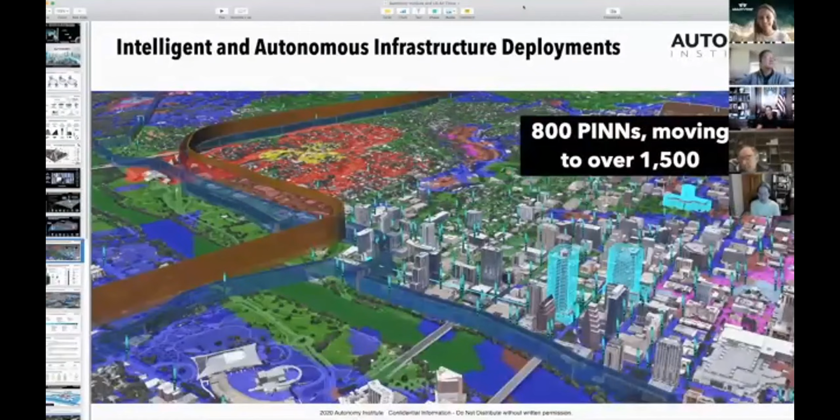This technology will have great benefit to the needs that we have in Alaska and the Arctic, where conventional aircraft, vehicles, and vessels oftentimes can't operate.

Agility Prime is part of our Defense Department's long history of turning futuristic ideas into reality. I'm proud that the federal government is investing in revolutionary ideas. Agility Prime is leading the way.

This launch of Agility Prime is so exciting. This technology has the potential to make vertical flight more affordable and more widely available.

And with the encouragement of the U.S. Air Force and the entire federal government, American companies employing American workers can gain a head start and win a fair share of this lucrative market.

eVTOLs have the same agile, vertical takeoff and landing capability as helicopters, but are quieter and should cost much less to operate because of their electric motors.

We are becoming a trusted innovation partner in commercial tech. I could not be prouder of this initiative. I could not be prouder of this team.

And I am excited to see how quickly we can go to help commercialize this market for our nation, so that our warfighters have options they don't have today, and our nation has an economic advantage far into the future.

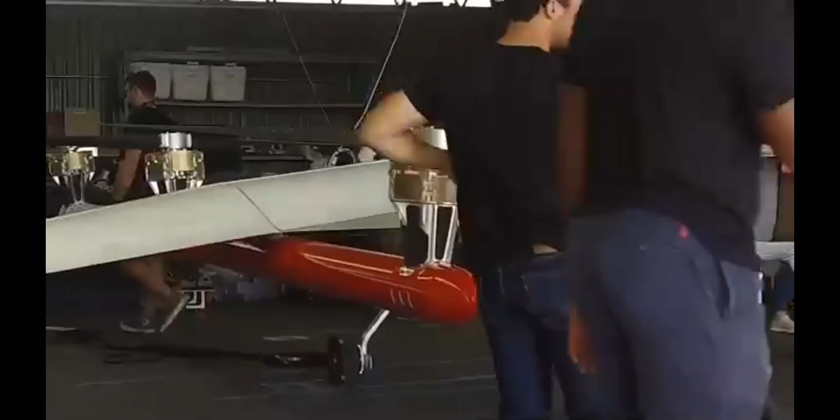It is truly a great credit to Agility Prime. They could put on this virtual event with so many hometowns of the United States represented.

You know, industrial base is not really about just what a country can make. More than that, it's about the people who dream up what to make. And then, of course, those people who make it.

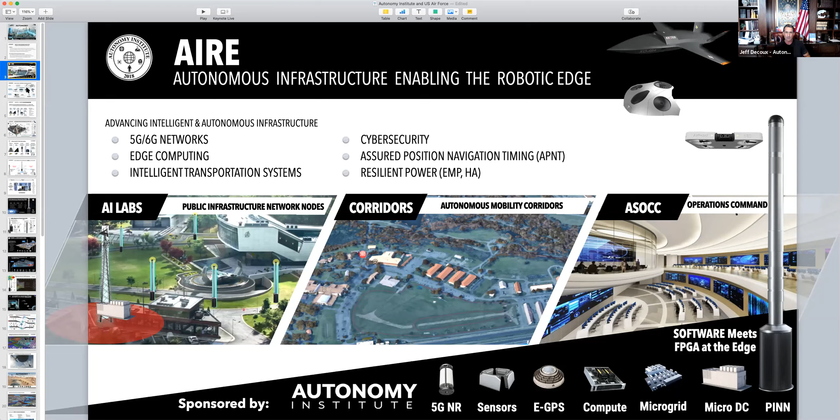By having these labs, we can accelerate testing, which will eventually lead to larger areas within cities, and that leads to the critical piece we're all dependent on—the policy and regulation that will support and embrace it, where society will actually enjoy the benefits of these new technologies.

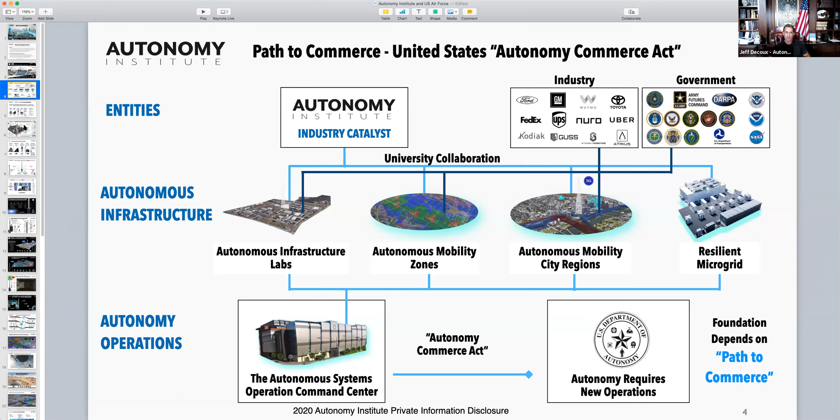So I'll leave it at this slide because it helps understand the magnitude of the challenge. This is not easy. It's challenging enough to get a sophisticated flying vehicle, an orb, up into the sky, and for it to be reliable, resilient, and certified. It's an even larger challenge if we don't have the appropriate highways and byways defined that allow these things to be deployed within a city, a suburban environment, or even a rural environment. There's critical technology that has to be adopted to allow these things to exist.

Our mission is to, as fast as possible, get a number of these 24/7 labs to scale test and allow a lot more collaboration between industry partners, academia, and government. We're looking forward to the initiatives of AFWERX and Agility Prime, because they happen to be the leading agency really driving innovation forward that we see from the DoD. I'll stop there for any questions.

Just for me personally, I haven't seen your talk before, so I'm a little curious—what is the benefit of having these PINNs distributed across cities instead of using something like a satellite network or a radar, wider area network?

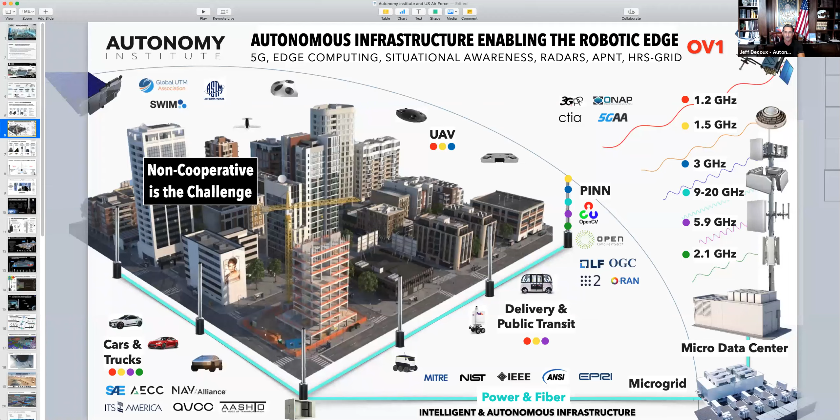If you're not aware, this is a good slide to show. If you're in a city, most likely you're starting to see things like this happening across the city, where a lot of antennas, whether cameras, lidars, or other types of radars, are being deployed by all kinds of different companies. That has to be solved through some infrastructure, and it's going to be densified with additional 5G, edge computing, and ITS technology.

So those are being handled by the P3, public-private partnerships. The funding for that, $150 million for, let's say, the scale of the City of Austin, is a process that's going forward to secure how this technology will be moving into the city and be supported for the community in that area.

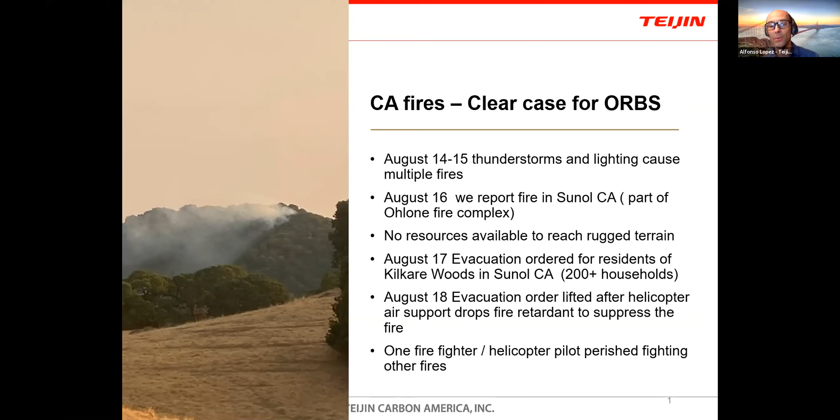And so I think orbs there are a clear case for this. So with that, thank you. Keep the passion. And for me personally, if there's orb makers that are tackling this, please call me. I would be personally very interested to work with you and support with Teijin materials wherever possible.

Okay, so Teijin is a global company. Teijin Carbon America is where I work. They have a lot of business divisions. So I'm just going to cover the composite material side of things, and that's Teijin Carbon America. Renegade Materials, high performance, high temperature stuff. Teijin Aramid, a lot of impact, abrasion, fire resistance, and safety applications. And Continental Structural Plastics, which one day may be bridging the divide between aerospace and very high rate components.

Okay, so just a quick overview. If you're taking screenshots, this is a good one. I'm not going to go into detail, but this has websites where you can get that kind of stuff. I'm mainly going to be talking on Teijin Carbon. I'm not going to be covering OPF, that's for carbon stuff, not that applicable. And then I'll be touching on Teijin Aramid, Renegade, and Continental.

DuPont has done a really good job on marketing and making Kevlar synonymous with Aramid, but we call ours Twaron, and it does an exceptional job. Renegade, they are very good and work with the military quite a bit. They're a recent addition, just last year, to the Teijin group. And we're hoping in the future they're going to grow, get integrated, and we're going to have more material options and technology transfer to them from our Japanese and German research offices.

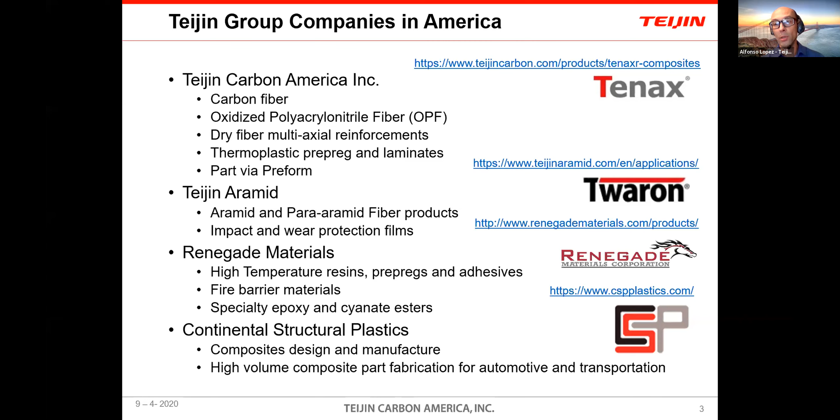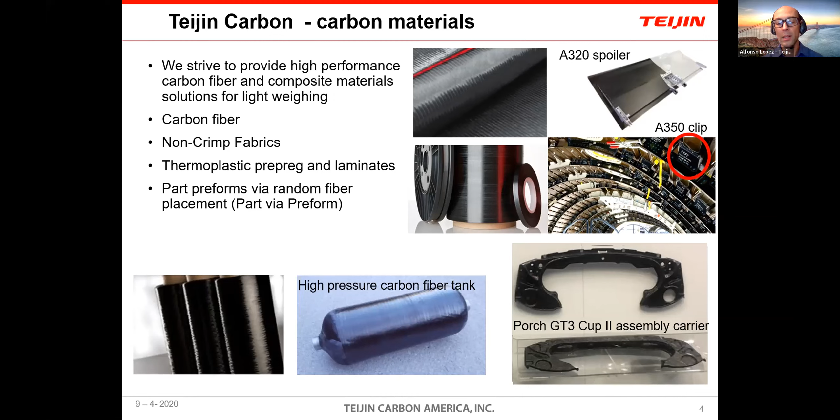Okay, I'm going to spend a little bit of time on this because this is my passion. In my previous life, I was an R&D engineer working mainly on out-of-autoclave stuff. And NCF, I think, is a very good option for orb makers that are going from design and thinking about high rate as well, just because of its qualities. You're getting more than 2 layers in one ply when you're laying it down, from 2 to 4 for us. It has excellent permeability and infusion qualities.

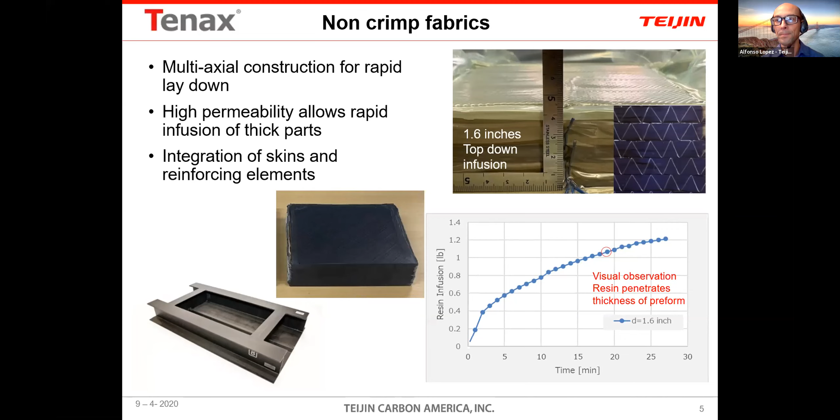We hope to see those results in the next couple months. And the second thing I'd say is please think of Teijin as a partner to learn how to use these. Most orb makers aren't ready for these. They require maturity, but you can start to learn and use them so that when you are ready, you know what to expect.

This doesn't get a lot of mention, but you can vacuum form these materials and get really good results. The most you'd need in specialized equipment is an oven that can go preferably above 400 degrees C. You do need to spend on things like polyimide film and high temperature sealants, but those are a lot less expensive than continuous compression molding or a steel mold with integrated heaters. You can start off as easy as a steel plate and just make panels to figure out how this stuff works, and move on to simple steel forms, L shapes, hat shapes.

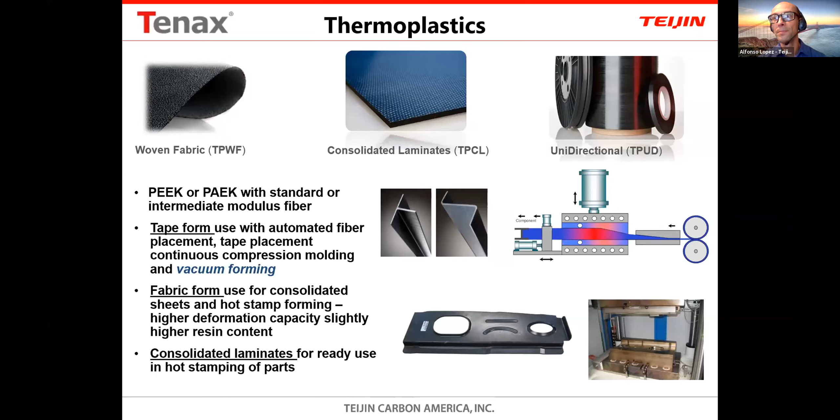The other one, and I hope Automaton's safety team doesn't get too angry at me, but they had a really good presentation the first week of the ecosystem, and their chute color scheme immediately reminded me of the supersonic braking chutes used with the Mars Lander rover missions, for which Teijin Aramid has been supplying cord. As well, there are other applications applicable for interiors where you might have wear applications, or high pressure vessels where you want some sort of covering in case of explosion and shrapnel.

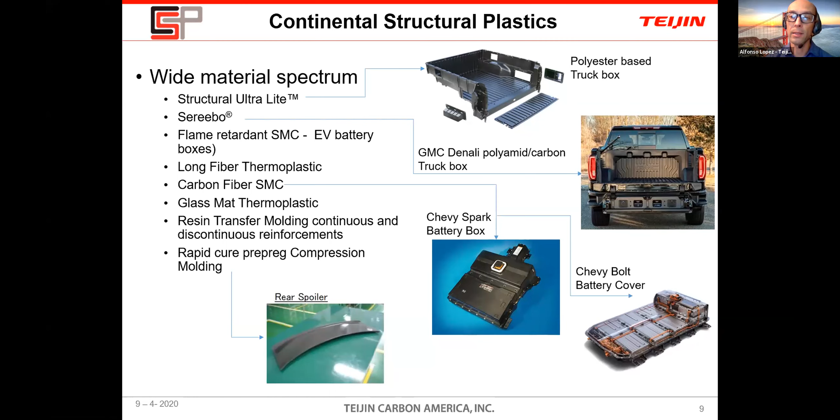Finally, something I'm really excited about is rapid cure prepregs and compression molding for primary structures. That picture on the bottom is a rear spoiler for a sports car, but with the appropriate resin system, that could translate into primary parts for rapid fabrication.

Last slide is just another screenshot. Here's our contact information, get in touch with us, use this as a soundboard for learning. If you need anything, just let me know. I'm personally very interested to work with orb makers looking at first responder type applications. With that, thank you very much, and I'll turn it over to Sterling.

Thanks, Alfonso, that was great. Just a question for me, out to the ecosystem in general: for folks starting up and working on their designs, what do you think is the best pathway for them to start incorporating composite design when engineering design tools don't have the strengths and design limits associated with your products?

Well, that's a good question. For a lot of early companies, they're looking for stuff that's readily accessible. Teijin works directly with big OEMs, not so much with early startups, but we are changing our practices to support small quantities. I think NCF is a direct material we offer that would be applicable when you're starting to learn about infusion. Most orb makers look at fabrics, but NCFs, as the commercial side demonstrates, really offer a good balance. They're easy to infuse and work with, and very robust for RTM or infusion processes.

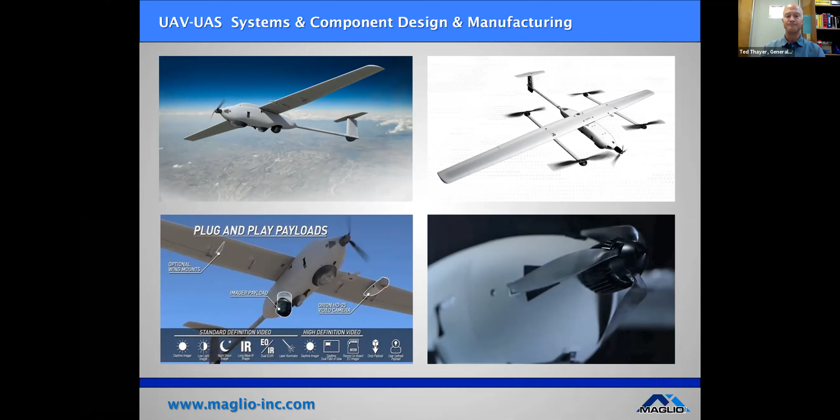To be clear, I want to point out in this slide, we don't manufacture these UAVs, but we manufacture most of the control systems, hardware, various carbon fiber pieces, and payload pieces, including retractable payload pieces. Let's skip the next slide.

So we specialize in engineering, prototyping, and short-run production manufacturing. We machine aluminum, titanium, plastics, brass, steel, and virtually any other material with a full complement of Haas mills and lathes. We perform carbon fiber layup and composites.

Other capabilities are assembly, electrical harnesses, industrial wiring, PCB soldering, mechanical bonding, fastening, other various composites like fiberglass and Kevlar, compression molding, trapped rubber, vacuum bag, casting with urethane, silicone, epoxy, finish work, laser cutting, engraving, machining, metal forming with a 3 foot by 4 foot, 150-ton metal press, metal fab, routing, CNC, electrical and mechanical assembly, vacuum forming, deep draw capability, testing, inspection, and various systems analysis.

If need be. Some of our clients are listed on this slide as well.

I'll close by saying a little bit about Maglio as a company. We've helped numerous customers over the years with various design, development, prototyping, and manufacturing projects. We really hold ourselves to the highest possible standards in terms of communication with our customers, staying within budgetary constraints, delivering projects on time, and ensuring all of our clients' and customers' end products meet expectations, perform flawlessly, and are really the absolute best they can be.

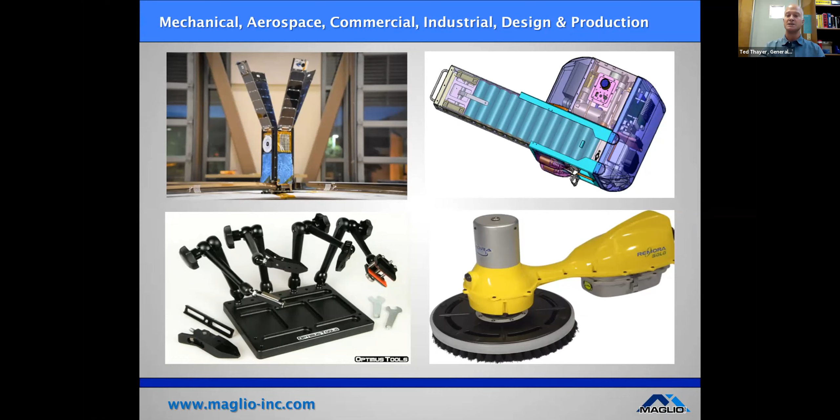I think to wrap this up, we're looking to potentially work within the Agility Prime ecosystem as a tier 2 manufacturer supplier for anyone looking for some of the capabilities we have. I'd be happy to discuss anyone's project or design ideas to see if we may be a good fit for your needs.

Per the request from Sterling and the Agility Prime folks to address some unique challenges we face, I'd say a routine challenge that we and most engineering manufacturing firms face, whether assessing, developing, or building out a project, is managing the inevitable project scope creep as requirements and capabilities morph and shift over time. Staying within budget is always a big concern, and we take that seriously. The key to successfully navigating this is constant communication with the customer and updates with the client, as you're probably all well aware.

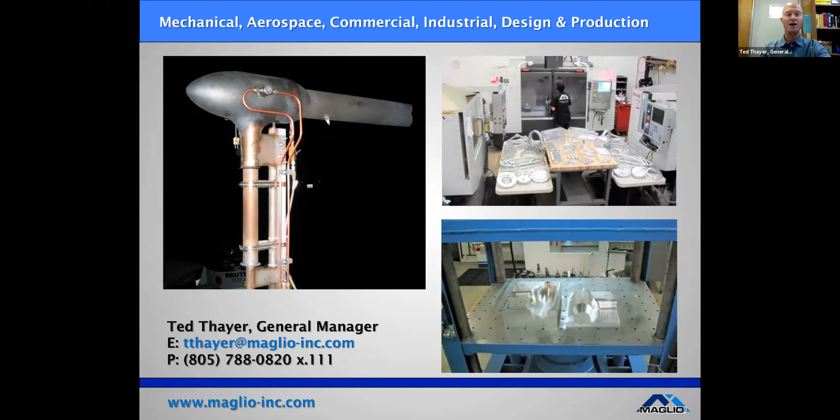Yeah, for sure, thanks Ted, that was great. It looks like you guys have a ton of capabilities for those looking for a prototype shop and maybe even smaller part, large scale manufacturing. Just curious, what kind of time frame does it usually take for you guys, depending on the part, from design received to initial manufacturing?

It can take weeks and months. Right now we're working with Lockheed's Missile Fire Control Group on a project where the ROM, rough order of magnitude, just came across maybe three weeks ago, and we're trying to put a budget number on that right now. Parts have been shipping frantically from overseas, various motors and other components, and we're really trying to deliver this. Luckily there's about a month reprieve, but within about 60 days. It's really a proof of concept project, directly UAV related, potentially for the US Navy, who's driving this project. Luckily this came to us while we weren't super impacted with other projects, and it's a really neat project we're excited about, so we're able to dive in and devote our full attention to it. Candidly, it's in the engineering phase right now, and those guys are feeling the pressure, but we can move pretty quickly.

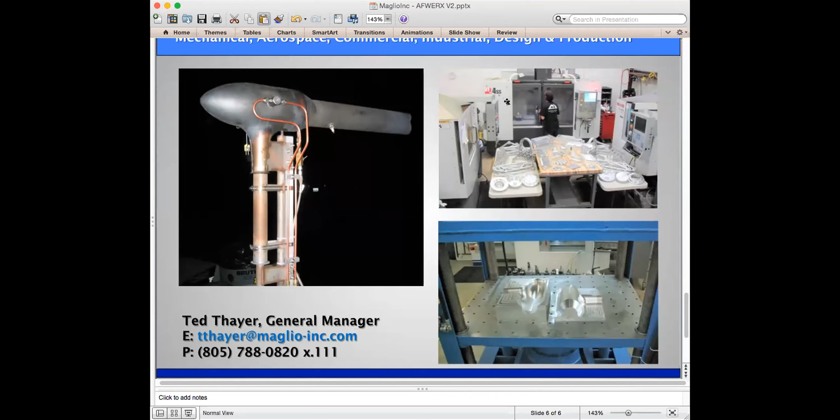I'm here, can you hear me? Yeah, we got you loud and clear. Ted, if you could just stop sharing so Chris could share. There you go, Chris, appreciate you, Ted. All right, let's see. Okay, I think I'm sharing now. Yeah, we got you, sir.

Great, thanks for having me. My name's Chris Kucera, I'm with OneSky, a new company founded by Analytical Graphics. I live near DC.

Co-founder of the company. We just started back in about December, but we've been at the UTM problem for about 5 years now. UTM is a UAV or UAS traffic management system. I have a strong background in modeling and simulation, having worked for Analytical Graphics for about 16 years and been involved in various aerospace and defense projects. And I'm also a commercial pilot, so that's the perspective I have on UAM, AAM, eVTOLs, and all those different things.

What I wanted to talk to you about today is a bit of a pivot from the last two presentations on hardware, back toward what Jeff and Atreus are doing at the Autonomy Institute to solve the infrastructure problem for AI. We're a little more focused on the actual aviation infrastructure needed to fly more routine flights, beyond visual line of sight, especially for these AAM type vehicles. I wanted to run you through my thoughts on the problem set and where I think the industry should head to support this kind of activity.

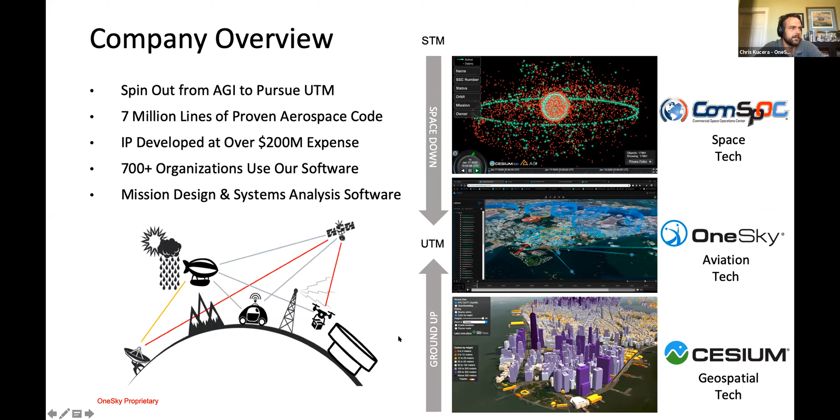Assumptions I have going into this presentation: early UAM flights will be manned, using existing ATM infrastructure—so we're not taking the pilot out of the cockpit in the near term—and we'll be flying in these corridors, increasing volume over time. As that volume increases, we need more automation, and that business model can't be realized without automation. And to get there, we need infrastructure.

That infrastructure can come in the form of software like UAV traffic management to automate the tasks of ATM, UTM, and GCS integration. It also comes in the form of the things Jeff was talking about—the pins—putting that infrastructure where it needs to be to conduct the ComNav surveillance activity for AAM and UAM.

If you get a chance to see Jeff's video on infrastructure, you can go to his website—it's a great discussion of how you get into a new domain and not expect to build infrastructure. How do trains work without railroads? How does telecom work without telephone lines or cell towers? As we wake up into the age of UAM, I think we need to understand that existing ATM infrastructure can only take us so far, and we're going to have to pay attention to that and build new things as we need them.

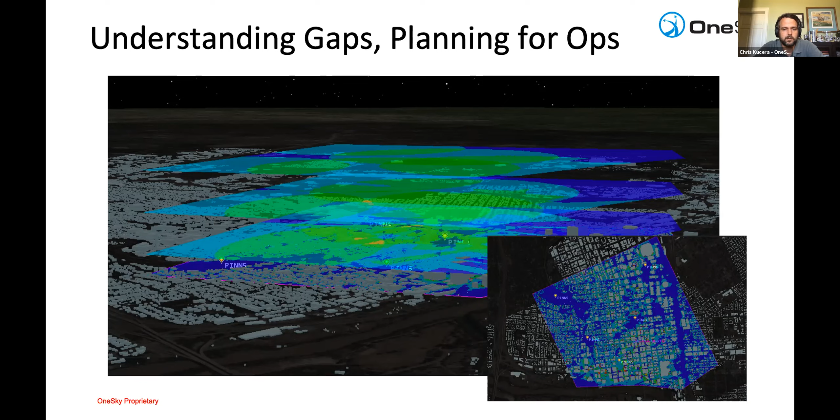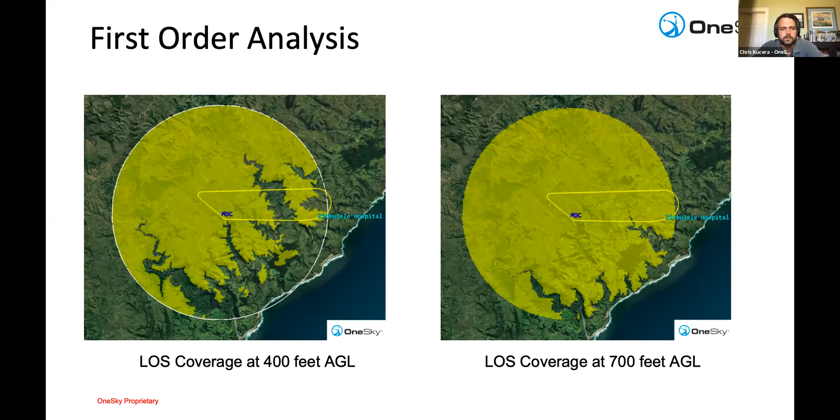The way we do this is using our commercial software capability, Systems Tool Kit, shown here with a communications example. First level analysis looks at just terrain interaction, how terrain is impacting your visibility from the air vehicle. We look at what infrastructure you have out there, like a point-to-point ground station supporting the flight, and what terrain is getting in the way. This shows coverage at multiple altitudes.

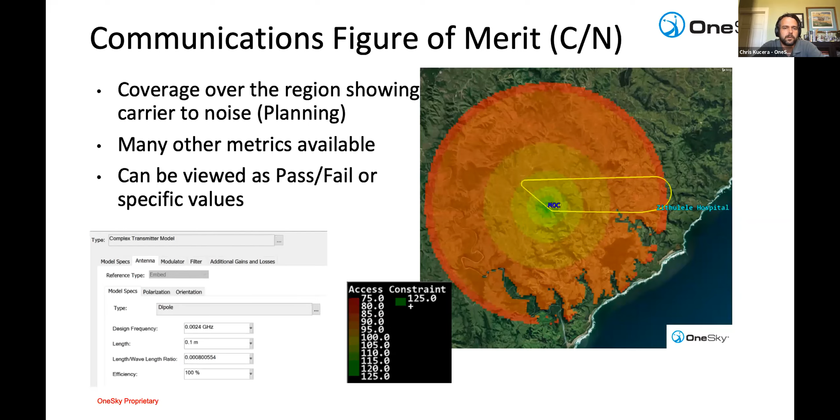The second thing would be to bring in higher level fidelity models to do comms analysis, looking at the RF parameters onboard the vehicle and at a ground station. We're looking at communication, carrier to noise, power perhaps, and where that could be supported from the ground station to a flight in the region. Then you can apply that to the actual route, seeing where you might have problems along the route and where you're probably good.

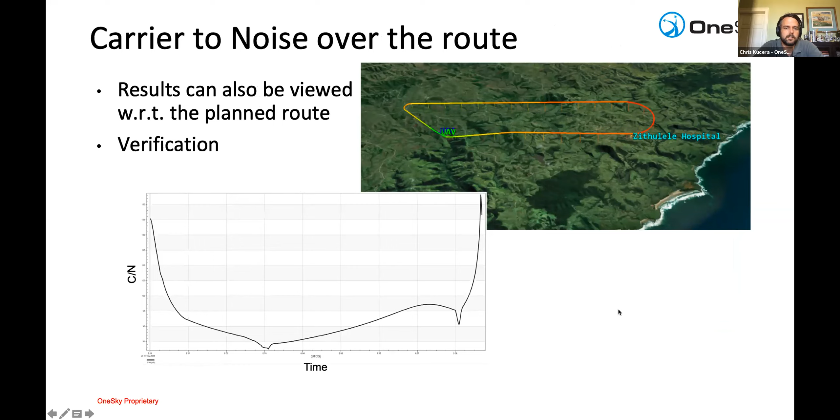These things can then be deployed in the operational system using what we call an SDSP, a supplemental data service provider. You can consider this a black box, but it allows you to push in a flight plan or tracking data and get back metrics about how the system is supporting you or will support you on a future flight. An SDSP can be developed for communications, surveillance, navigation, terrain interaction, weather, acoustics, and various different things.

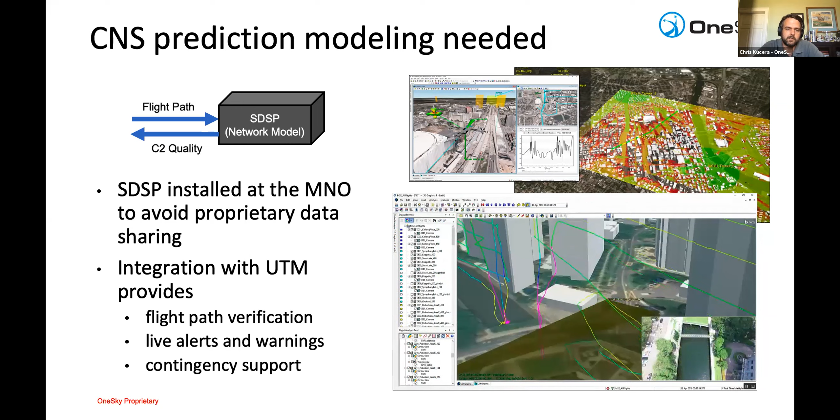Our approach to the industry is to model things in advance and help people plan out their UAM environment and flights using our software, then put them in the right format, these SDSPs, to enable their use in operations. So, I guess this is the sales pitch slide.

We give modeling and simulation solutions for the UAS and UAM industry. We're modeling CNS, airspace, helping with airspace design. With our partnership with Cesium, we understand ground data sets, GIS information, and how to integrate them into an operational solution—how buildings impact things like acoustics or low-level weather. We've been in the game for about 30 years with a lot of experience on the DoD side, and what we're developing now is specifically developed for the UAM industry.

So what we're interested in is helping you investigate UAM infrastructure gaps. How is CNS currently supporting your activity? Where might you have problems, and how can you fill in those gaps with new technology or new ways of doing what you're trying to do?

And finally, as you get towards operations, which hopefully is in the near future, helping to provide operational solutions like UTM services, doing that in the near term and the long term. So with that, I appreciate the time and ability to give you my perspective here, and I'll hand it back to Sterling.

Yeah, thanks Chris, that was very interesting. One of the questions from the audience that was right in line with what I was going to ask is, what cities do you need more data on? Do you guys use LiDAR drones to get your geospatial data? And what kind of validation or regression testing do you do to prove out your predictive models?

What the product we sell is based upon the Data Distribution Service Standard. It's managed by the OMG, the Object Management Group. We have over 12 different implementations worldwide, so we're not the sole source on this. It comes in 3 parts. The top part is just a DDS API. This is what application programmers write to. The bottom side is a wire protocol, so everybody's exchanging the same type of information over the wire. And then we have a DDS security plugin. So after you have your system working, you can then add different types of DDS security and secure that down to the data elements, so you're going to have different pieces of data being secured by different authentication and encryption capabilities.

The DDS Secure is based on the security standard. We have these built-in plugins that are ready to go. It runs over top of any transport, you don't have to have a special transport to do this. It's completely decentralized, just like DDS, it's peer-to-peer. Once again, different agencies and different companies can add their own encryption and authentication for data being contributed to the UAM network. We have authentication, access control, cryptography, data tagging, and logging with the security standard, and you can bring in your own type of encryption and other capabilities as required.

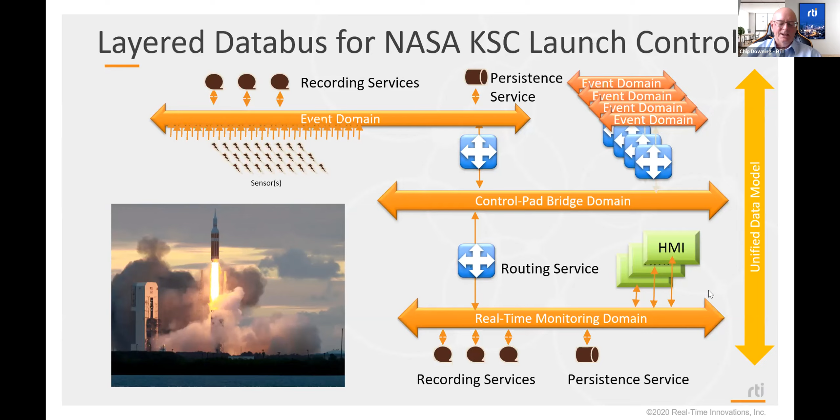We have a new product called Connext Drive. It's very powerful. It's actually based upon DDS and enables ROS, ROS2, and AUTOSAR to then be quickly used inside of our environment. If you know anything about ROS2, Robot Operating System 2, it's actually based upon DDS, the standard, and we enable that and then bring in other capabilities.

You can then do fleet management - how are you actually going to manage these fleets? What happens when things stop? You can then do teleoperations from there. And then you can start to monetize that information that you're building out in the ecosystem with information up in the cloud.

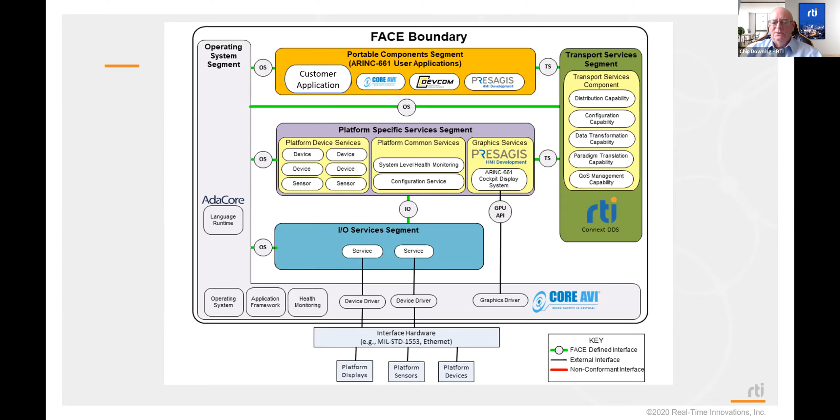We have been working with FACE. I personally have been working with FACE for over 10 years. RTI is the first company to get what's called certified conformant FACE transport services segment back in 2018, and we'll have the latest version of FACE, looks like 3.1, in Q4 this year.

One of the most powerful parts of our product is our COTS DO178C DAL-A certification evidence. This is a complete package of certification evidence that you can give to your FAA examiner or anybody else going to review your platform. And it's ready to go as far as the RTI, either DDS and or TSS components. We're going to certify both.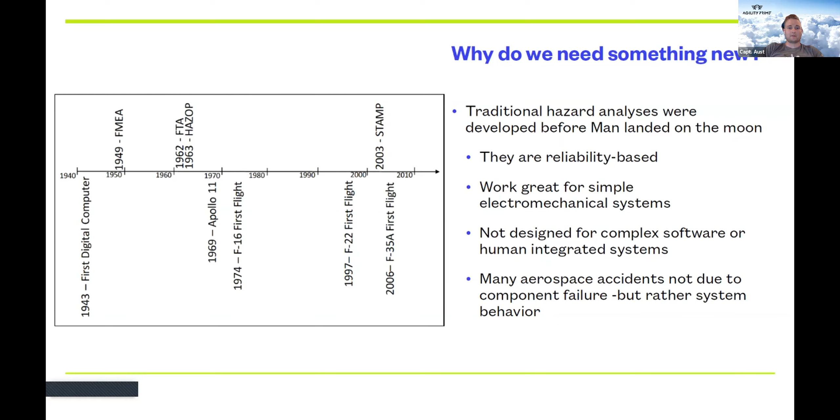All right, so we can go to the next slide. So we needed something new. When you're looking at reliability engineering, so your more traditional hazard analyses, a lot of them are trying to solve the problem of how do we eliminate or reduce unsafe scenarios that are triggered by a failure.

And even the Air Force is doing this with our criticality analyses that we do, of which component in the missile or which components in the airframe, if those go down, then everything breaks. And the problem with that is when you look at reliability engineering by itself, it doesn't cover scenarios that aren't triggered by a specific failure.

But then we have these scenarios where there was no failure. The system behaved exactly how it was designed, but the designers didn't take into account the interaction between the components and that resulting system behavior. So this is where we have either system design or a combination of system design and component failure that leads to accidents. And the goal of STPA is we want to try to control that system behavior through systems engineering to prevent accidents from happening.

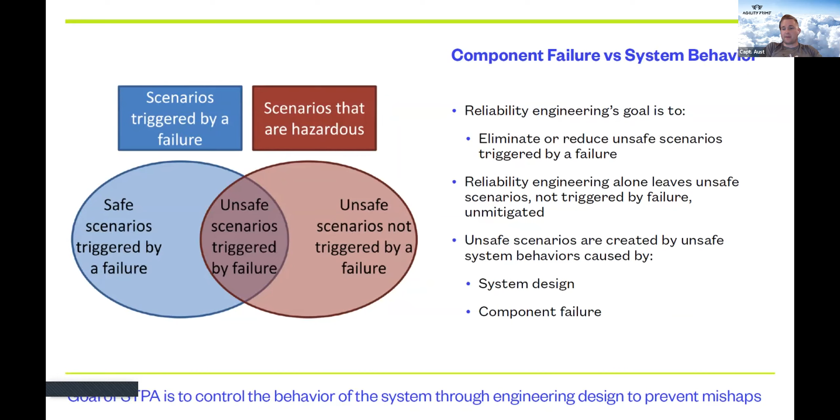All right, next slide. So how do we do that? How do we handle complex systems? Anyone who has dealt with code or looked at modern computers, billions of lines of code. And especially if you look at an i9 processor, you can zoom in to the size of a pinprick, and that pinprick takes 50 to 100 people to understand how that one little piece works.

So imagine we have an F-22. There is no way that we can sufficiently decompose that and understand all of that functionality. And even more so, how does the avionics of the F-22 interact with the fire control system? How does that interact with the pilot? How does that interact with the communication system? These systems have become too complex for us to easily understand.

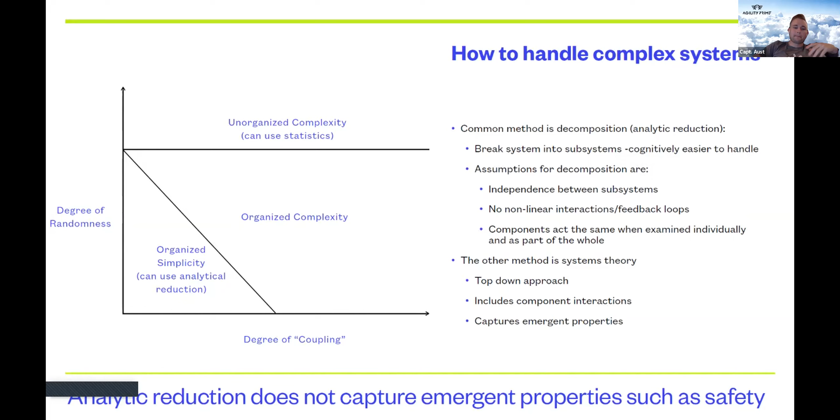So what is STPA? In short, it's a systems engineering approach to investigate the mishap or accident before it happens. We start with the high level: what are the accidents we're trying to avoid, what hazards can lead us there. We model the system at a functional level—what functions the system has to accomplish, rather than how it does that, what computers, servers, and physical parts do that. We look at functionality, what does it do.

From there we can see where that can go wrong. If we know where it can go wrong, I can develop scenarios of why this unsafe action may occur. I can hypothesize these accidents before they ever occur. This covers, empirically, everything FMECA, FMEA, HAZOP, FTA and all the other approaches cover. STPA finds all of the same things and more, so we can do everything we could before, and now we find edge cases the designers never thought of, and design that out before you end up with an accident.

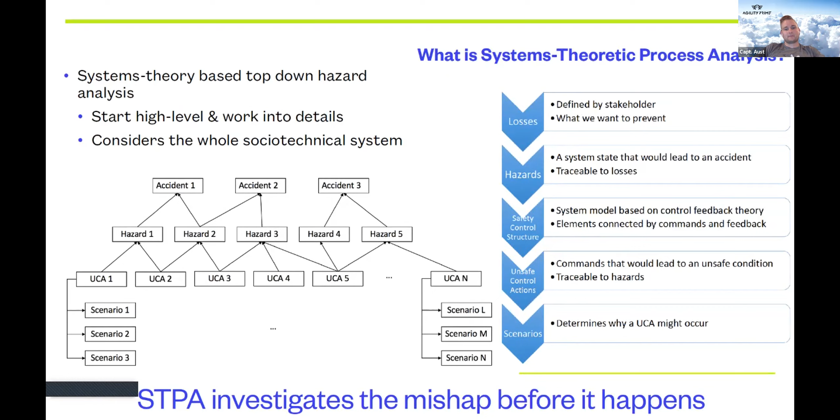So the question is, how are we using this with Agility Prime? Next slide. And the answer is threefold.

First and foremost, we're using this as the foundation for our military utility testing. So any prototype we think may be useful for military testing, once we get to that point, this is how we're going to test your system. We're going to analyze it, develop our test cases, and this is our measuring stick of whether it can meet our needed functionality.

But even more so, we're planning on sharing everything we do with our partners. What this means is STPA, which is part of DO-356A Appendix G, can satisfy the DO-326A airworthiness security process requirement for FAA certification.